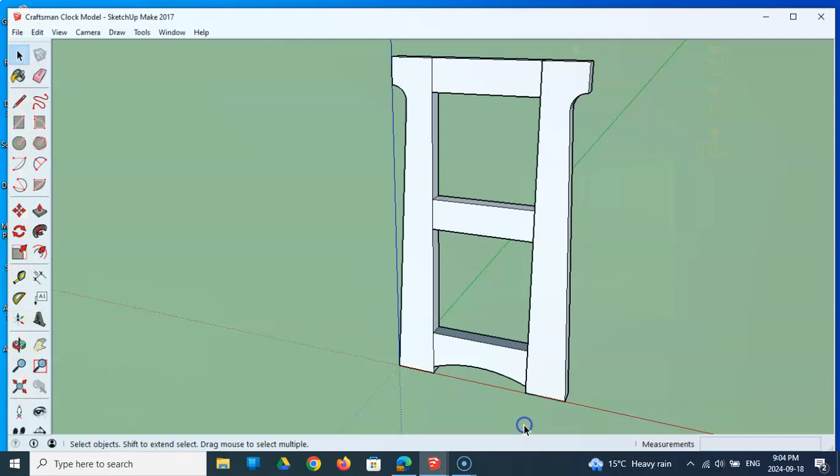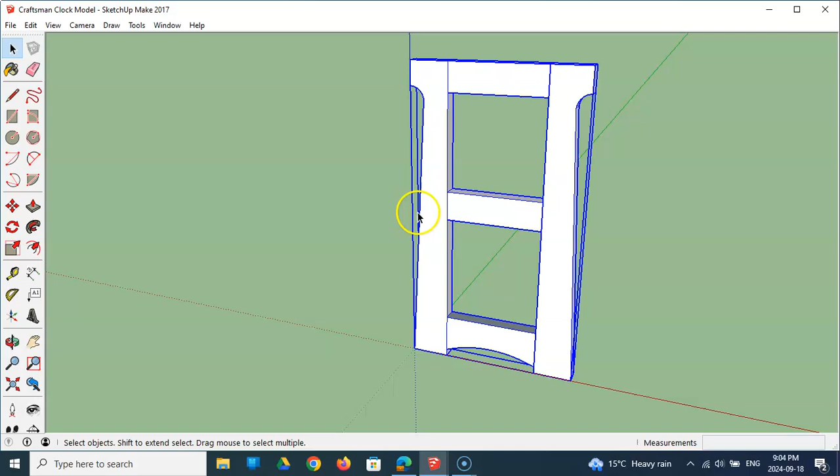Let's begin where we left off with this model. We drew the face frame. The first thing we're going to do is group it. With your cursor, draw a box around that, right click and group. Now this was a group before, but we added this to the group, so when we explode it later, we'll have to explode it 2 times.

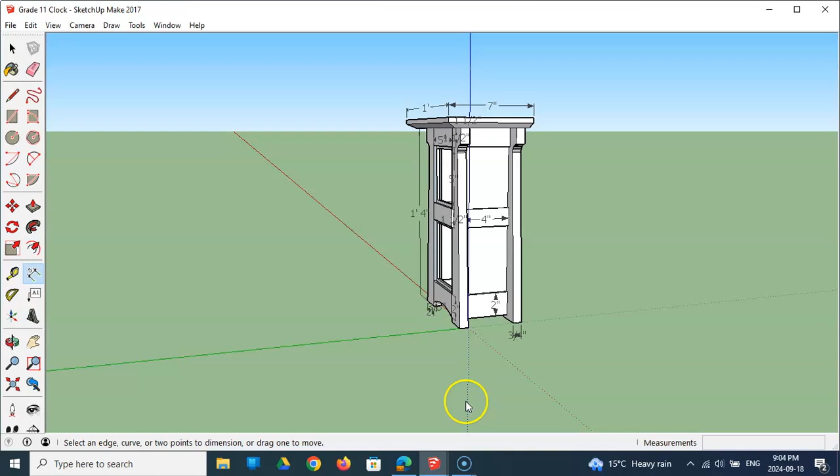Now that we've done that, we're going to build the sides. The sides are 4 inches by this height, which is 16 minus 3/8. We're going to build it as a solid panel and then do some indenting and unindenting and things like that. That's how we go at her.

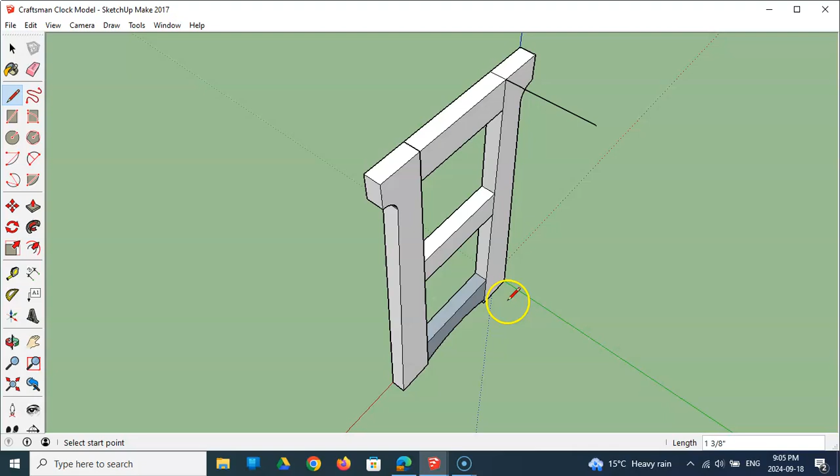Let's orbit to the back. We're going to begin by drawing a line from here out on the green axis 4 inches. That's not on the green axis, let's try that again. On the green axis 4. There we go, I'm going to press escape. I'm going to do it again from the bottom, from where this arch comes around and meets the leg, out on the green 4. I'm not going to detach from that, I'm just going to link up to the top. No, that's not right, that should have went solid.

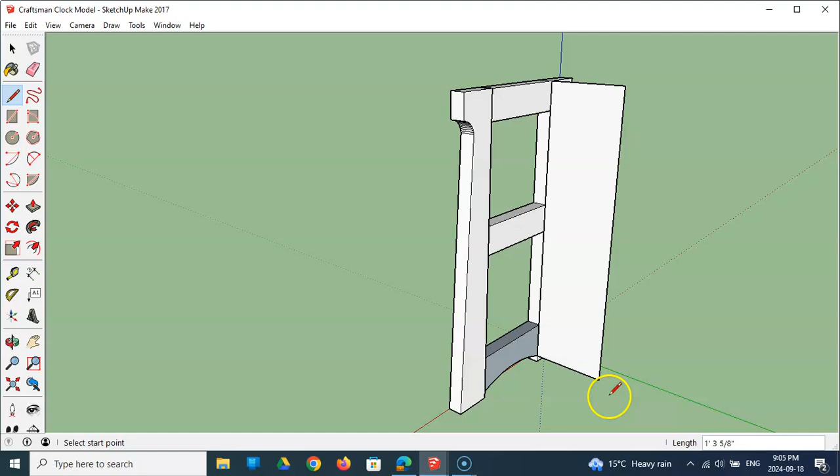Maybe it didn't go solid because this is a group. Let me see, if I draw from here down, that's why. So you have to draw this side as well. We need a panel that is from this bottom of the curve to the top, 4 inches out, down and back. Use your push-pull tool. Actually, not yet, sorry. Get the pencil, click from this point across, and let's just get these points lined up with the boards on the face.

There we go. Now grab your push-pull tool, simply take and push these 0.75. And we'll do the same with this, 0.75. And the bottom, 0.75. That went the wrong way, control Z that. 0.75, there we go. And get your pencil and redraw the straight lines, just to make them solid again. See how they went hollow?

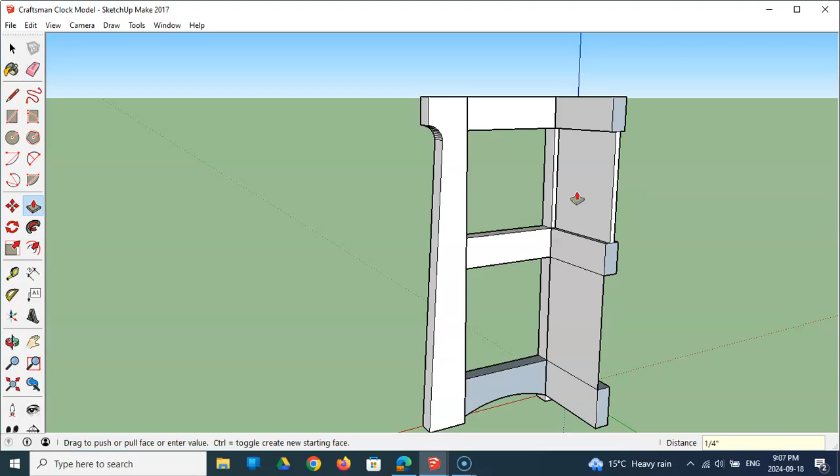So there we go, and then we're now going to take and push-pull this that way, 0.5. And again, if it went hollow, just redraw the lines. We're going to do it again, 0.25. And you can see that gives us a panel right in the middle of that 3/4 inch. So do the same here, push-pull 0.5, and then 0.25. There you go, that was so easy. Let's do it again on this side.

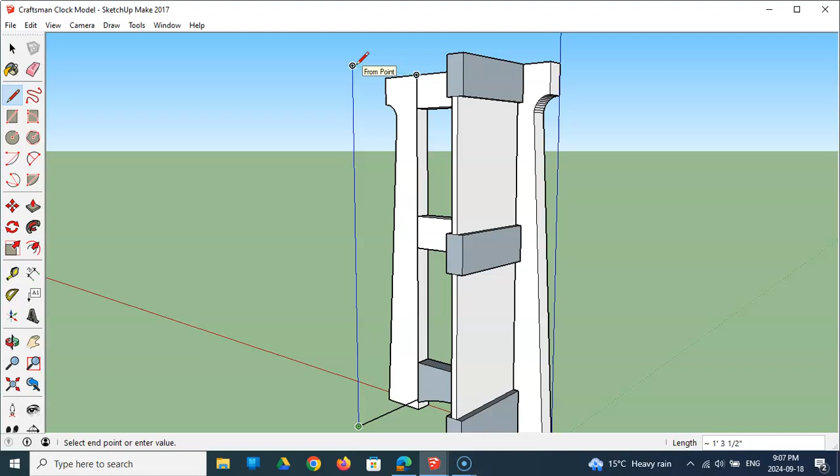It's harder to see on this side, but still doable. We're going to go straight down to that point, come out on the green 4 inches, press enter. We could try going up, and if it guesses where to go, that works. If not, we could just go from the other point, because I don't know this dimension, it's whatever, 16 minus 3/8. But we've got to go from that point to that point, make it solid, double check, everything's lining up.

I'm good with that, happy with that. Let's pull this. No, sorry, I made that mistake twice. Before we push-pull, we have to draw these lines. Boom, boom, boom, and boom. Now we can push-pull this, 0.75.

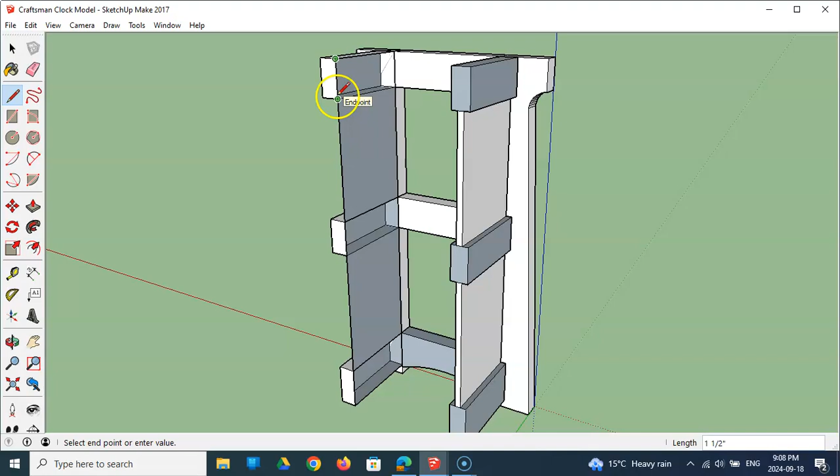We can just match that to that point, match this to this point. Redraw. I'm going to cruise through this because I've showed this already. And 0.5 extrusion on this, and then again 0.25, and 0.5, and 0.25. There you have it, your side panels.

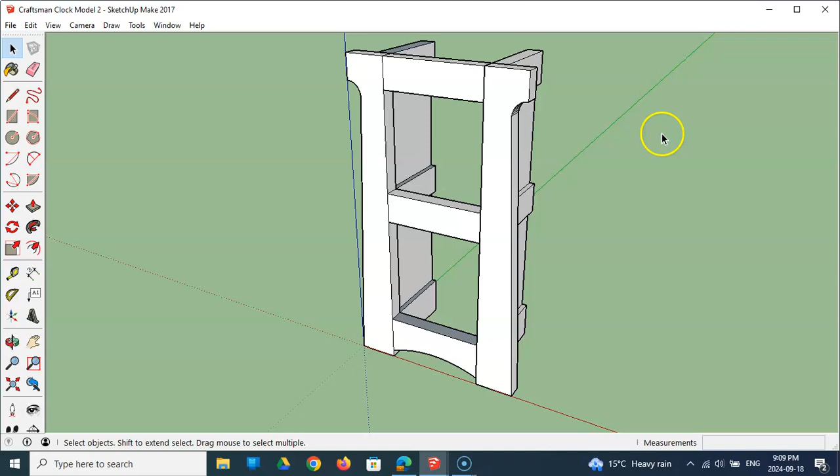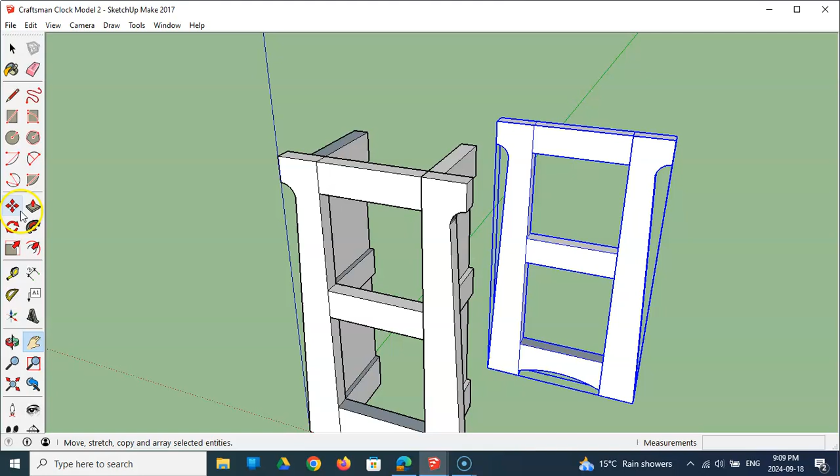Now remember we grouped this front. The reason we did that before is so we wouldn't have to erase the stuff we didn't need when we copied and pasted it. So when we click on this, it's grouped. Click on it, press Control C and Control V, and you're going to get another one. Now we're just going to place it, put it down first of all. I'm just going to press H or get my hand. I want to move it using my move tool from this point to this point. So I simply get my move tool, click on this point, and go close and click on this point, just like that.

Okay, I'm going to get my pencil, deselect all of this. I'm happy with what I have so far. Now let's do the top.

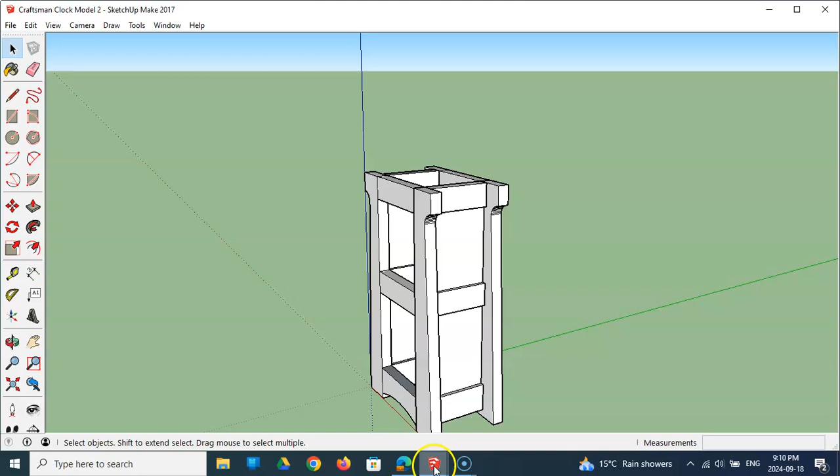The top, if you take a look at the example, has a 7 by 12 inch, or 1 foot by 7 inch top, and it overhangs 1.5 inches over everywhere except the back. The back is flush. Now I had measured it before, that's why I know the overhang, and I also drew this, that's why I know the overhang. Okay, so we're going to do that now.

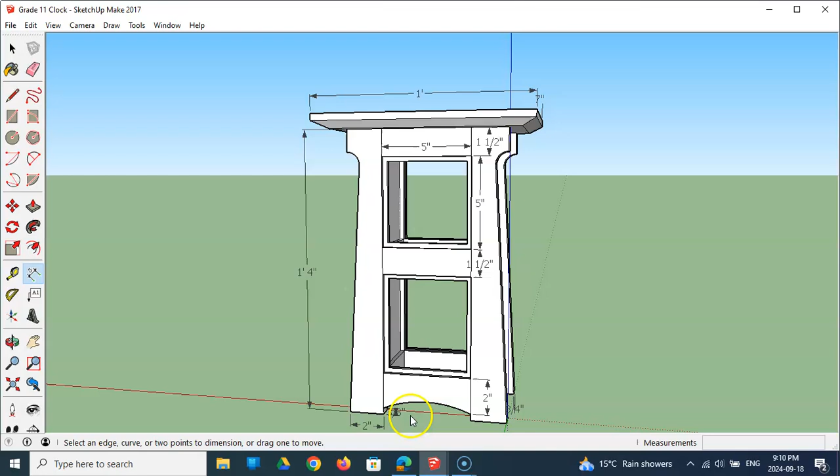Let's grab our model. To do this, I'm going to zoom in closer to the top. Simply take, we could use this tool. We could click on here, and then we could go like this and that. So I didn't click here, I just went to that point and went up, and I went 3/4 or 0.75. Okay.

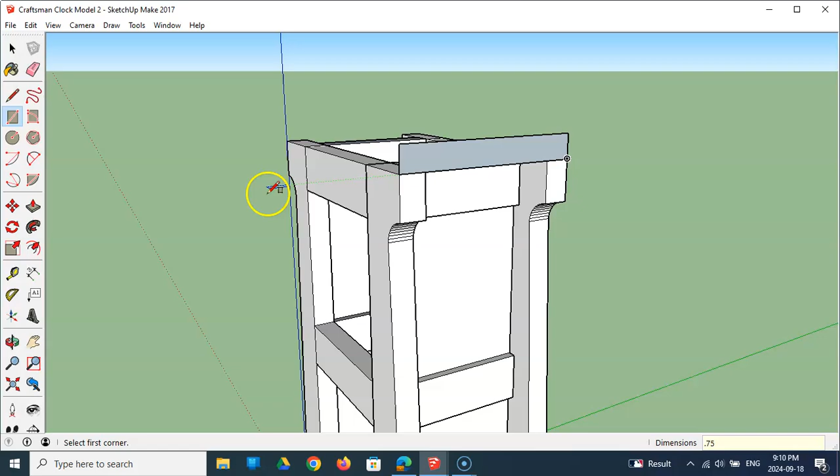That's just to show you a different tool. Now we can take our push-pull tool, and we're going to push this to the other point and lock it in. Now it's flat, there's no overhang.

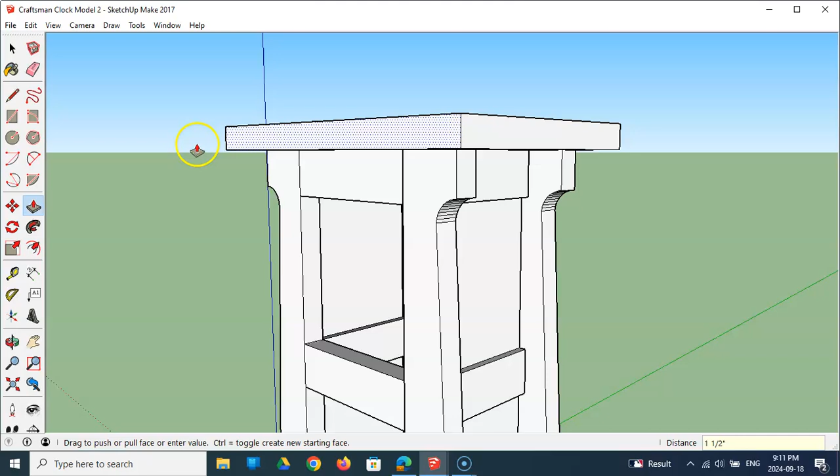I don't like that. I want some overhang. So I'm going to pull this out 1.5. I'm going to pull this forward 1.5. And I'm going to rotate to the other side. Pull this out 1.5.

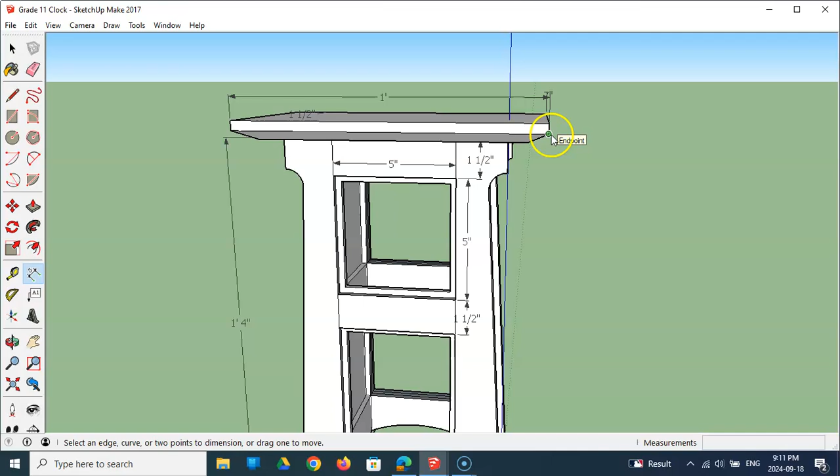Almost done. Actually, no, we have to still do some stuff on the inside. Now, the overhang has a chamfer on it. It has a beveled top. See that? So that beveled top starts halfway, and I believe it goes in about 1 inch. Let's see what that looks like.

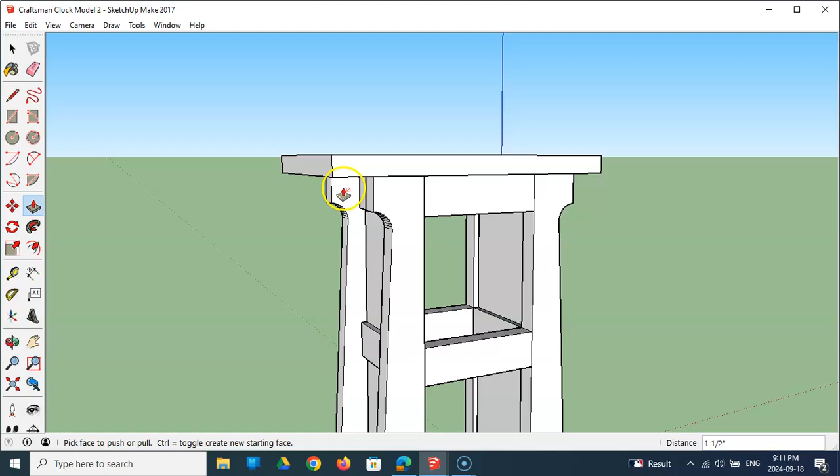That's neither here nor there, but let's just get a bevel on the top. Now we want to do that on the back side because we're going to use something called the Follow Me tool. So on the back, we're going to zoom in, and we're going to go from this point 1 inch in. So we're just going to drop this here, go 1 inch, enter, find that green dot, click on it, and then find the midpoint. See how it'll just jump to the midpoint on this side? So that's the chamfer.

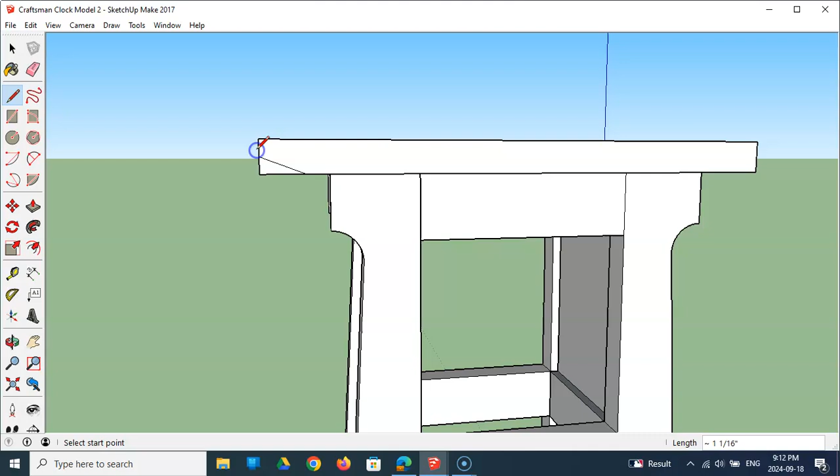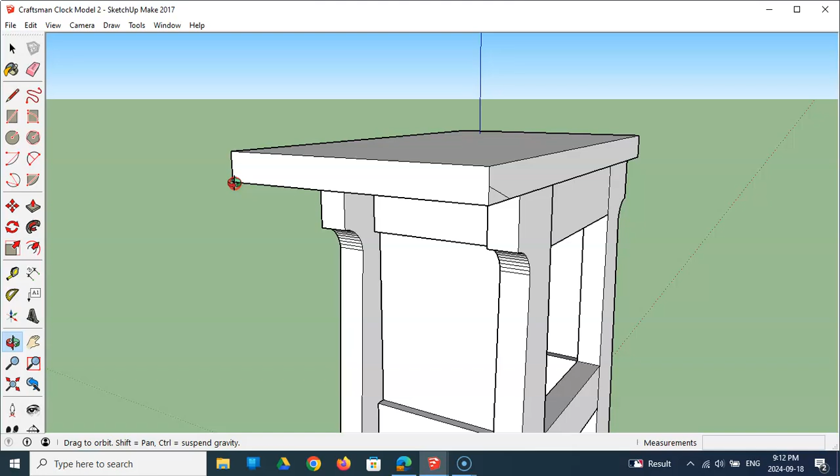You can do this with any pattern, but we're going to just do a chamfer. And then you use this tool here called a Follow Me tool. So what you do is you click on this pattern, okay, and I haven't clicked on it yet. I'm going to turn a little bit. I click on the pattern, and then I just take my cursor and go around the side. When I get here, I press the orbit, and then I go like this, okay, and then like this. You can see it's following me.

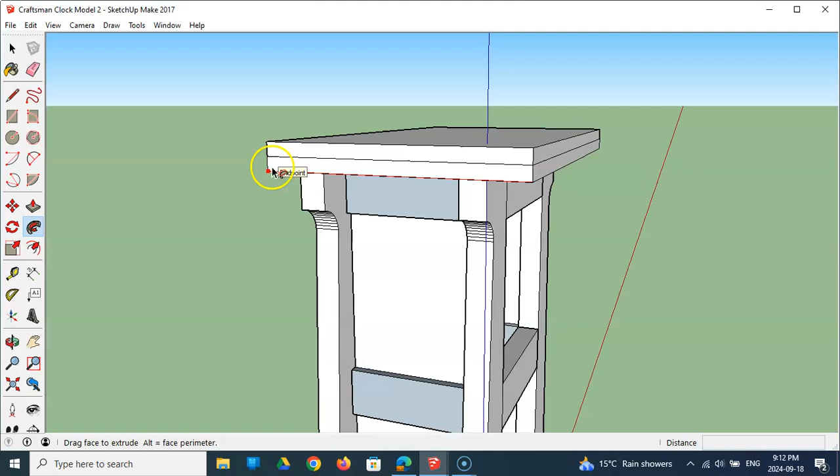It's asking me where do I want this chamfer to go. So I go to here, orbit, so far so good, and then I go over here, and once I get to here, I click. And it follows that chamfer all the way around. Now the design I just have to delete with my eraser.

Okay, there you have it. What a great time to save. File, save. We've already named it. Save.

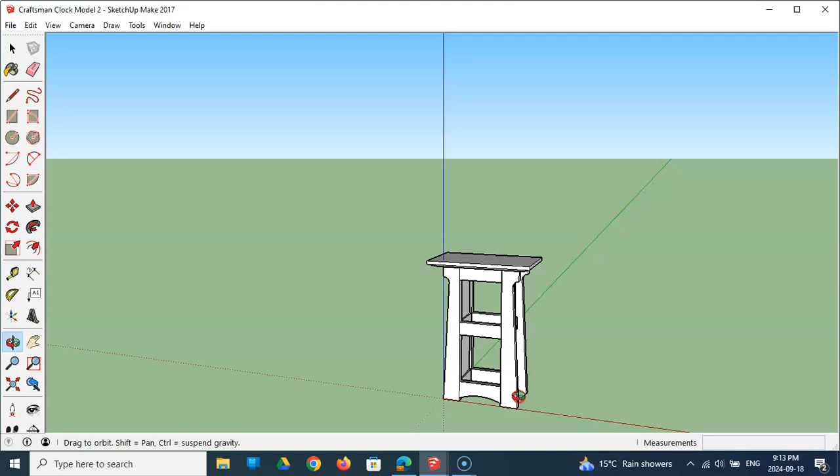Now the last thing we're going to do, and I've had some problems with this, so hopefully not this time. We're going to take this little, here I'll show you in the example, 1/4 inch by 1/4 inch centered in the middle, that little molding in there.

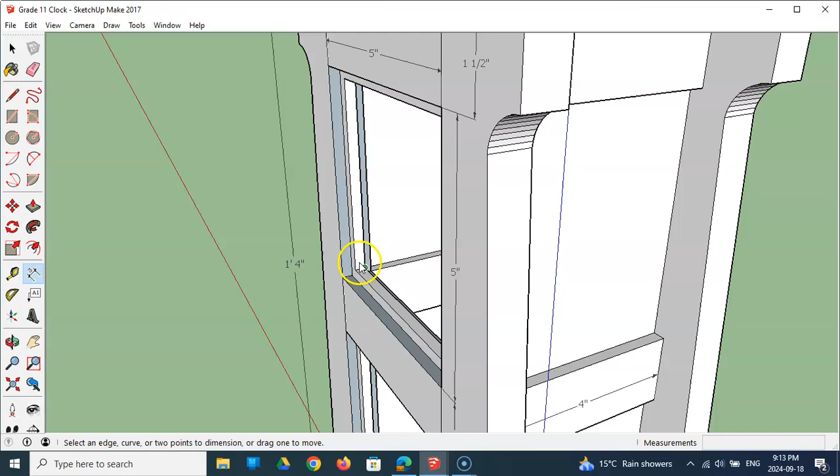Okay. Now that I'm looking at it, I think we're actually just going to make it - how are we going to do this? Well, let's try to do this. Let's see if we can make that work. I did it before, but let's see if we can do it again.

So back to our model. The way I did this is I grabbed the pencil and I just redrew one of these. Now because it's grouped it might not... No. So I'm going to undo that.

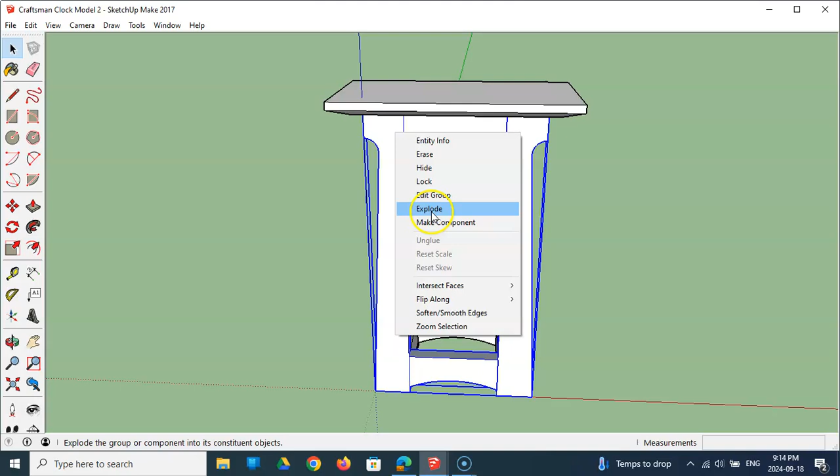Let's first of all explode this. Don't do what I just did. Click on this, right click, and explode. And we're going to do the same with this. We're going to explode any piece that are together. So now all these are individual pieces. So they're all exploded. I believe that's the key to success.

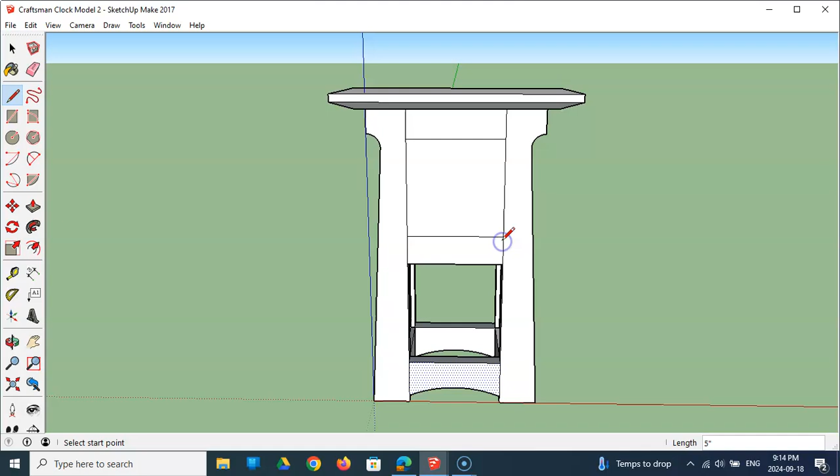Grab the pencil now, and we're going to just redraw one of these lines here and one of these lines here, and that will make this solid.

The tool we're going to use now is called an offset tool, and the way it works is on any shape, I can take a shape and make it - oh, I accidentally picked the bottom one, but you can see I can make it bigger and smaller.

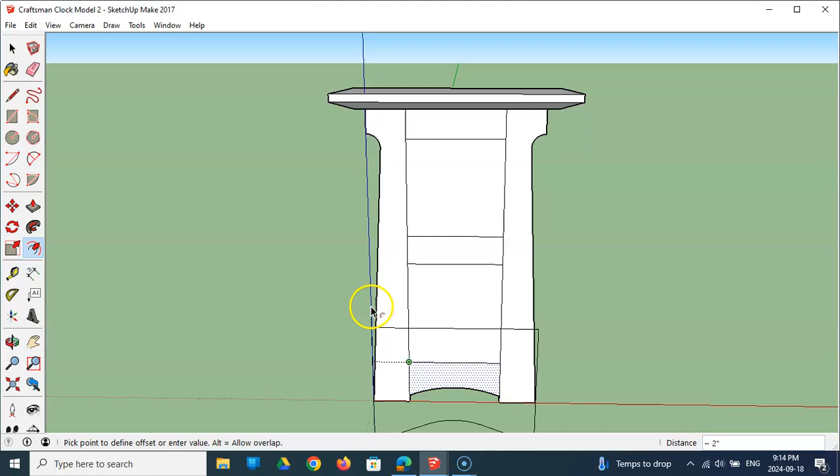So I'm going to press escape, and I'm going to go to this one. I'm going to just do a single click. Whoops, that double clicked. I'm going to do a single click, move my mouse, and you can see as I'm moving it, it gets bigger or smaller. It's asking me how big do I want this to be, how far away from that point. So I'm going to go 0.25, enter.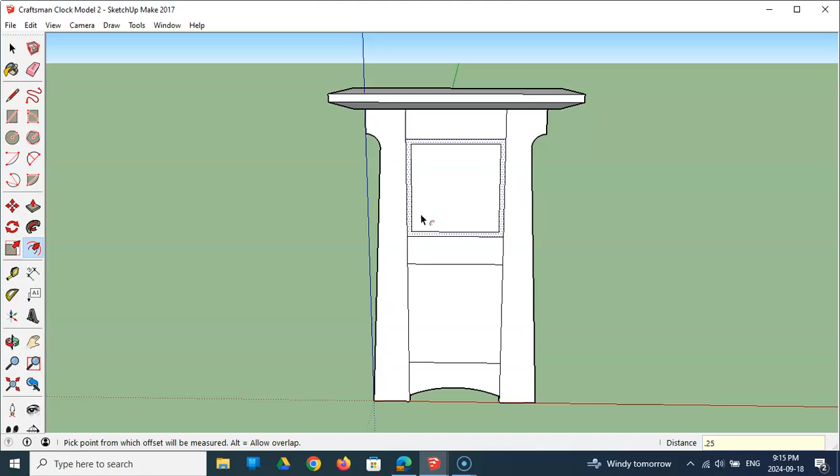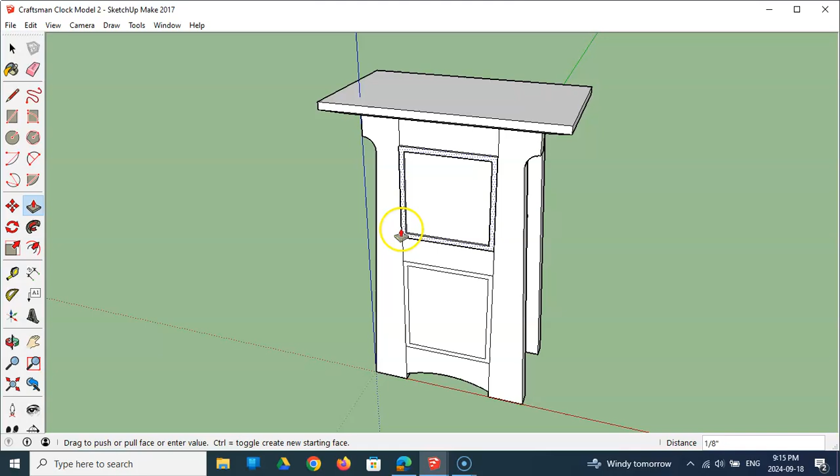And I'll do the same on the bottom since I have the tool. 0.25, enter. Now simply take, and I want you to push-pull this right here. Now you can't really see what you're doing. Well, I guess there you can see it's going backwards. So I want you to push it away from you. How much are we going to do? 0.5, let's go.

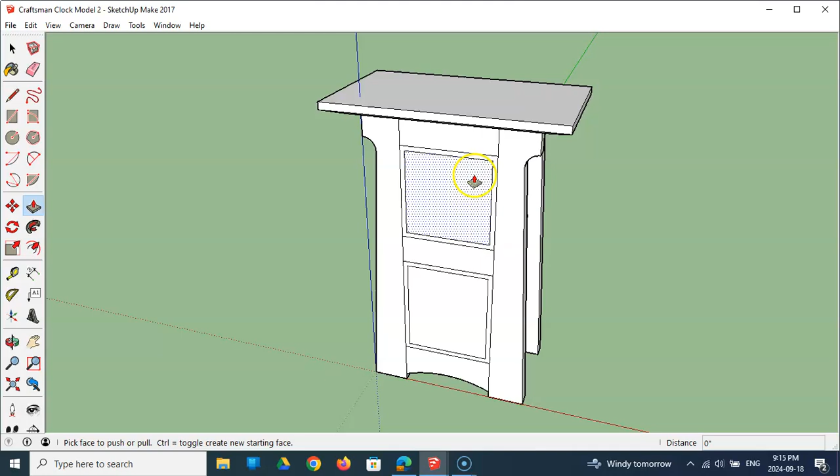Nope, nope, nope, that's not going to work. We're going to do it a little differently. I'm going to Control Z that, so pretend I didn't do that. First, let's delete the center - click on it, press delete. Okay, now you can see you've got this thin piece of paper here.

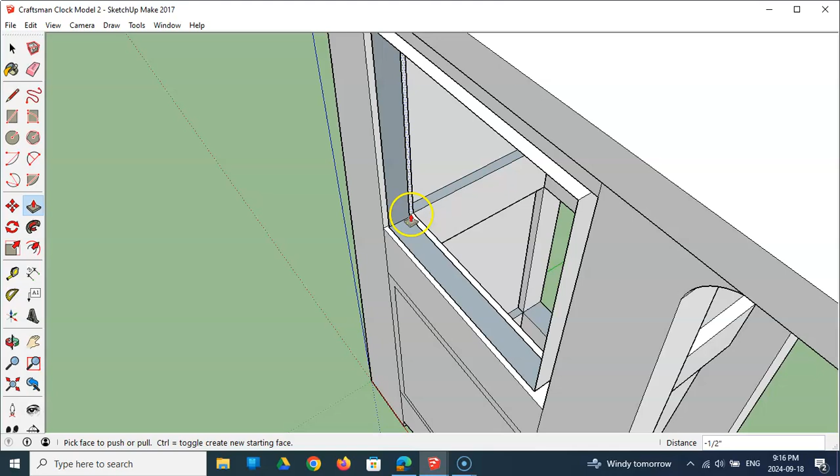Let's try doing that 0.5. I'm going to push this back, 0.5, enter. Okay, so what it did is you can see it didn't quite go because this is a 0.75 piece of wood, 3/4 inch, and it's hollow. So let's make that solid.

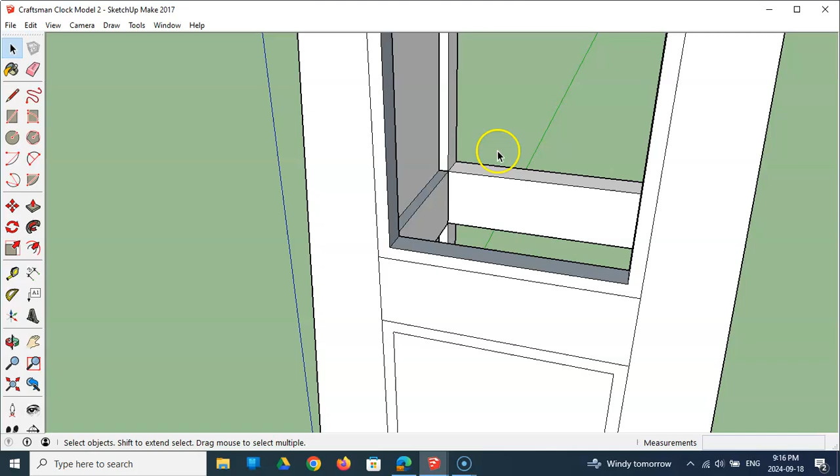It made the middle solid. Now let's make the outside solid. And then let's delete the middle - it's important that you do that, otherwise it doesn't seem to want to work. So once you've done that, this is now a solid piece. We're going to push this in 0.25.

There you have it. Okay, let's do the exact same thing to the bottom. We're going to delete the middle, and we're going to push that in 0.5.

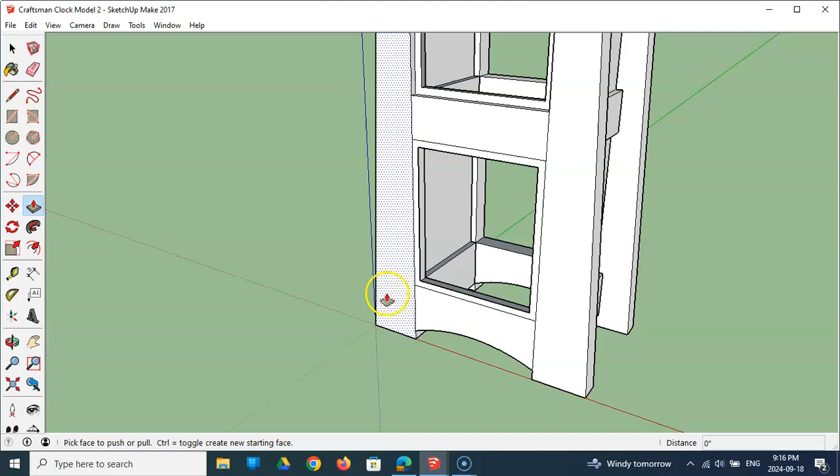Redraw this line to make it solid. Even though we're going to delete it, it's important you do this step. The computer seems to like it if we do it this way. Now delete the middle - okay, it just seems to work, trust me. I've struggled with this one. So now we're going to push this in 0.25.

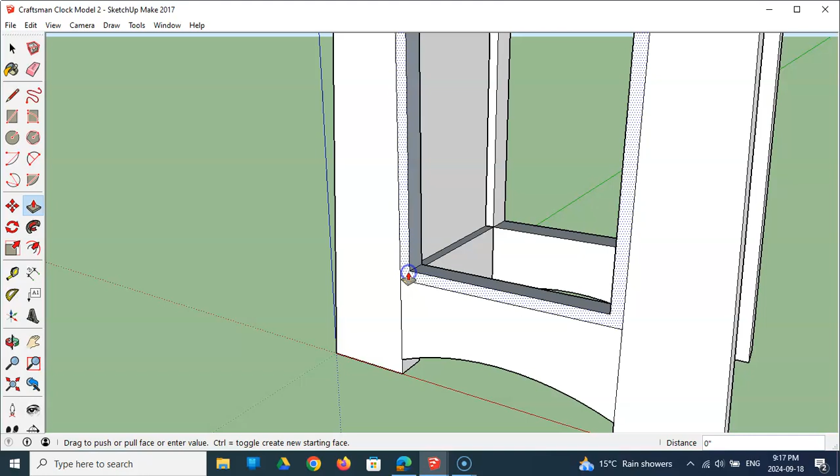There you have it, an almost completed clock. We'll fit that in there. Look at that, I like it. I like it so much I'm going to save it. What a great time to save.

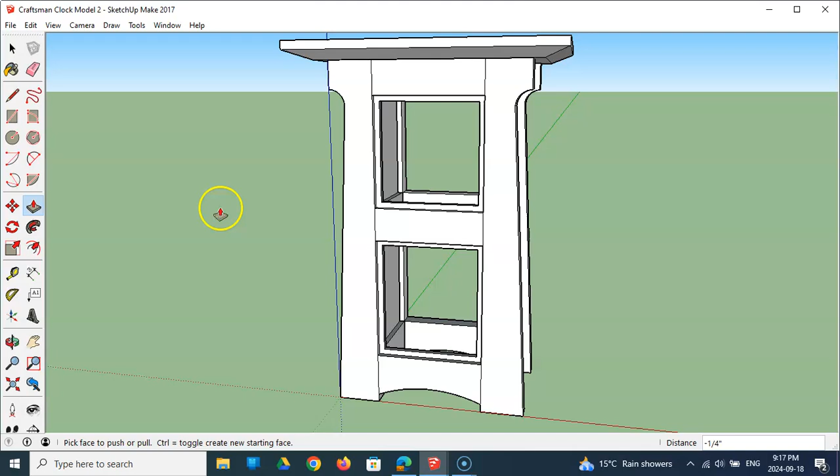Now here's a good chance for you to decorate it a bit, make it your own. I'm going to make this just wood, so a wood paint we'll put on it. You're going to be looking for a paint bucket. When you click on that, it opens up these trays on the side - you can get colors, components, styles, shadows, different things like that. If I click this down arrow, I can find wood.

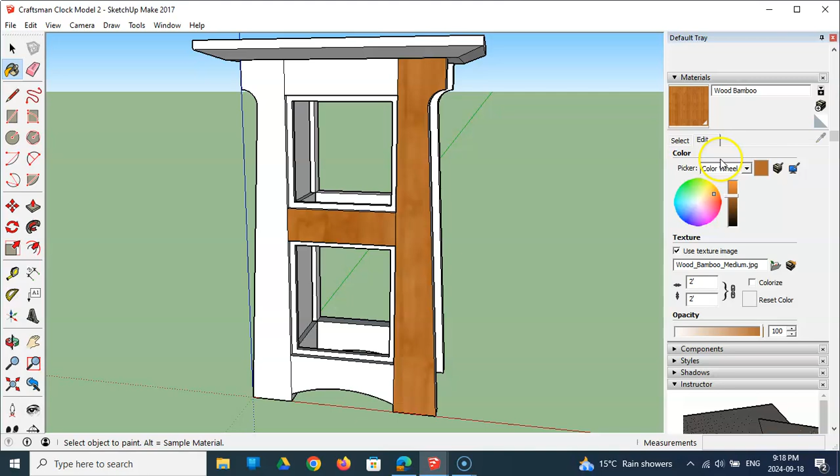There's wood, and I'm going to build mine with, I don't know, let's try this one, see what it looks like. We just click on it, and you can see that you can edit the texture, so you should be able to do the size here. Let's see if I make this 1. Yeah, you can see when I change that, it changes the texture.

Let's say I go 0.5, or let's say I make it 5. So it was at 2 before - I didn't like that blurriness. Oh, that's not too bad, I guess. So that's wood, that's one of the wood colors.

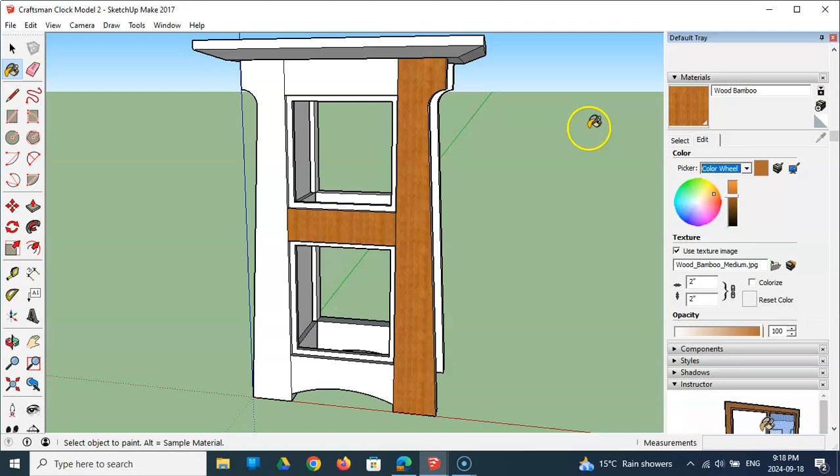You can change all kinds of things in here, so you can change it, make it your own. I'm okay with that. Once you have what you like, you just click on all the pieces - you've got to click on all the different parts that are white. You might have to zoom in.

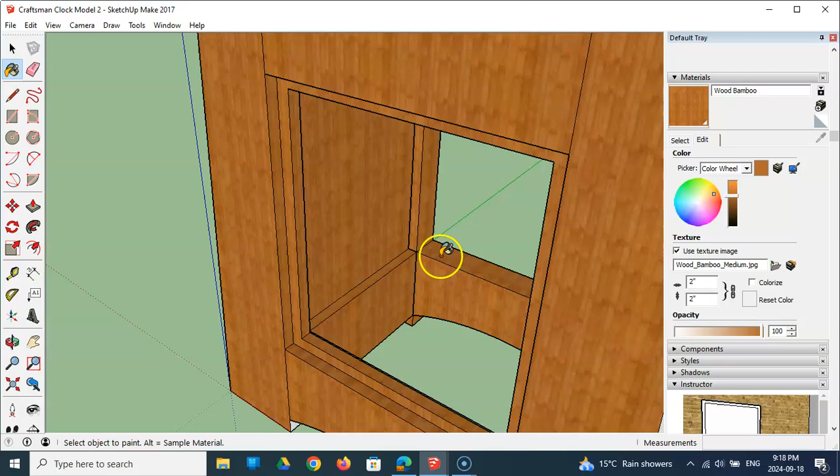Oh, see, notice how the back went all at once? That's because it was grouped. Oh, we gotta do each of these little things here. Interesting, we'll get to that. I'm just clicking the stuff that's easy right now.

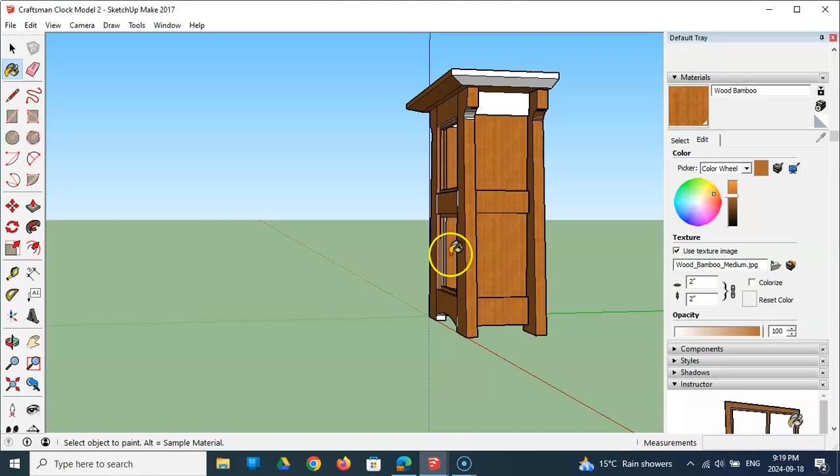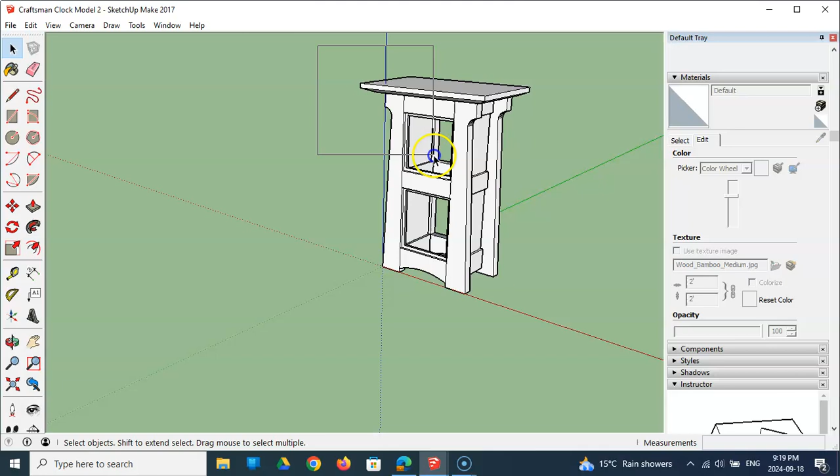I wonder, I wonder if I grouped the whole thing and painted it. Let me try this, I've never tried this before. Why not try it on a video? I'm going to Control Z until I get back to nothing, and I'm going to try grouping it all. Let's try this, because I want it all the same color. Right click, make group - now does it let me paint it?

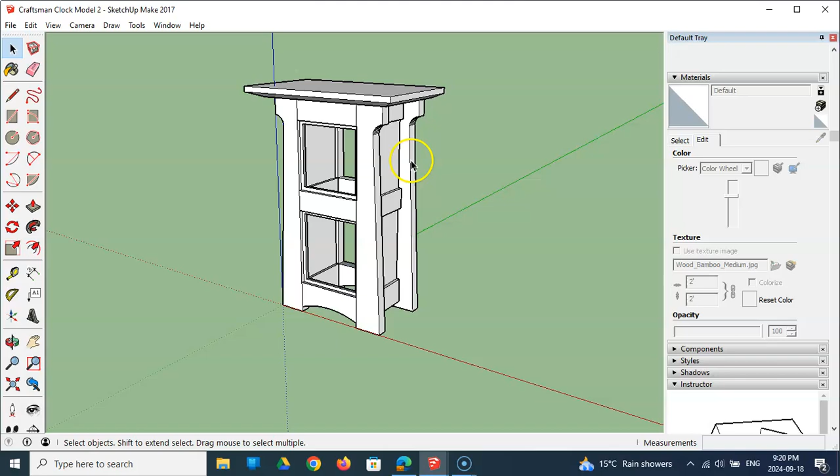No, come on. Doesn't like that. I thought because it grouped the back. I guess not, so I guess I'm going to Control Z the grouping. Oh, too much there, I'm going to Control Z that. Click on it - yeah, it's not grouped. The back is still grouped, which is interesting, so because that's grouped.

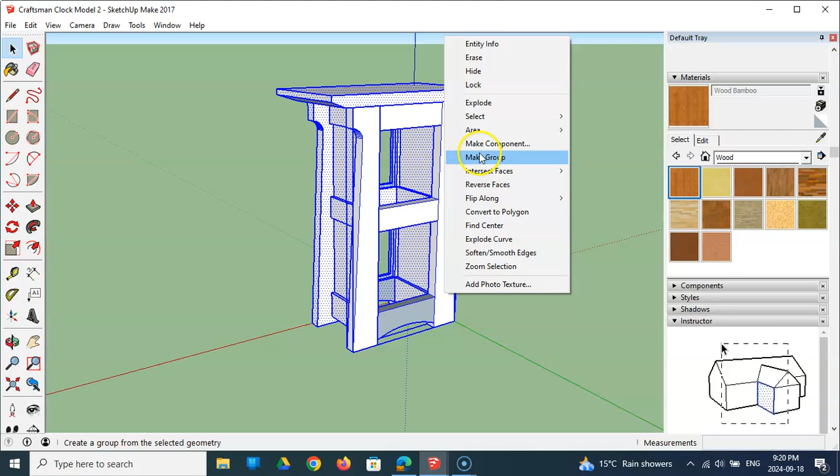Okay, so where is my colors? There's wood. Was that the problem? I was just not in the right spot? Let me see one more time. Maybe I was just not in the right spot over here. Deselect, grab this, grab that. Yes, it does work, I just wasn't selected in the right spot here. So there you go, you can group it and just paint it all at the same time. Huh, taught myself something new.

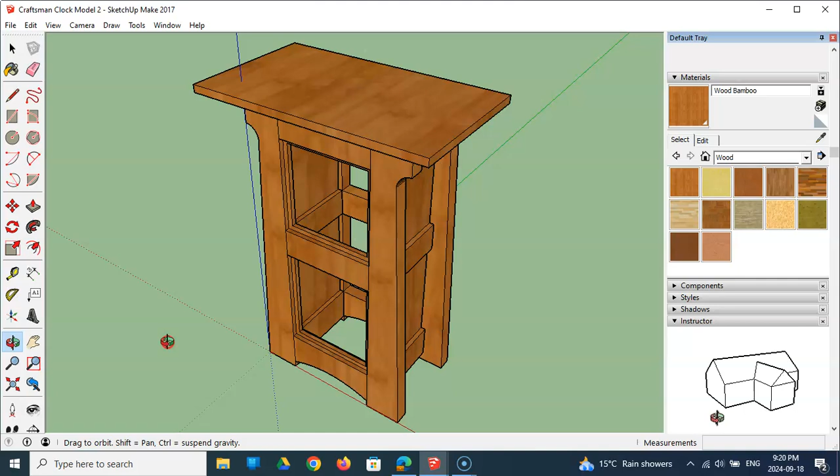There you have it, people. That you're going to send to me. But before you send it to me, you need to personalize it with your name. So grab 3D text.

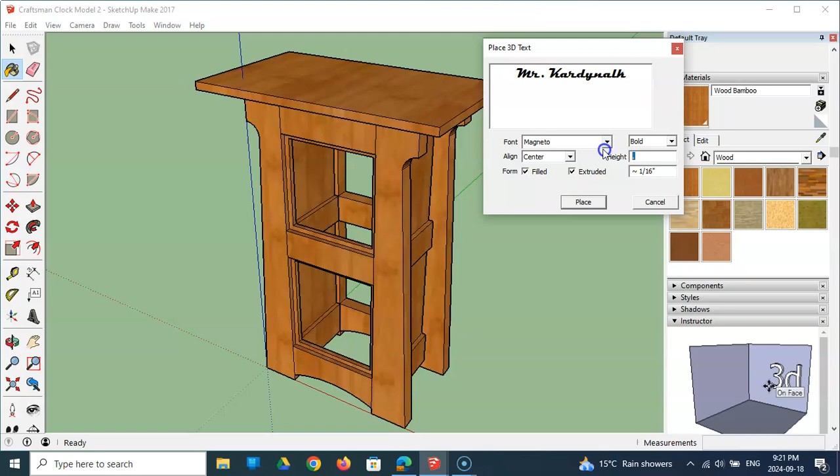And that pops up, I'm going to type in Mr. Kardynal. Now, 1 inch height - that's probably going to be too much. I'm going to put 0.5. No, that 1 inch might fit. I'm going to go 0.75 and see what it looks like.

Yeah, 0.75 is okay, I can place it. You can see I spelt my name wrong. You're kidding me. Try that again. Try that again - and that was pretty big and gaudy. I want it smaller.

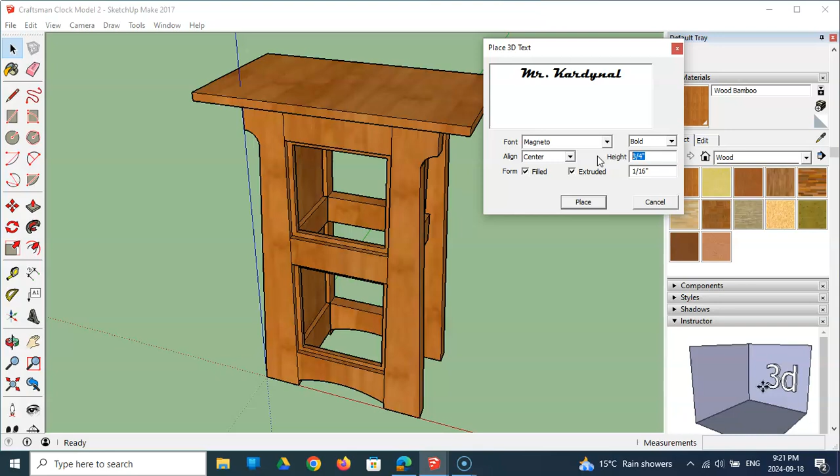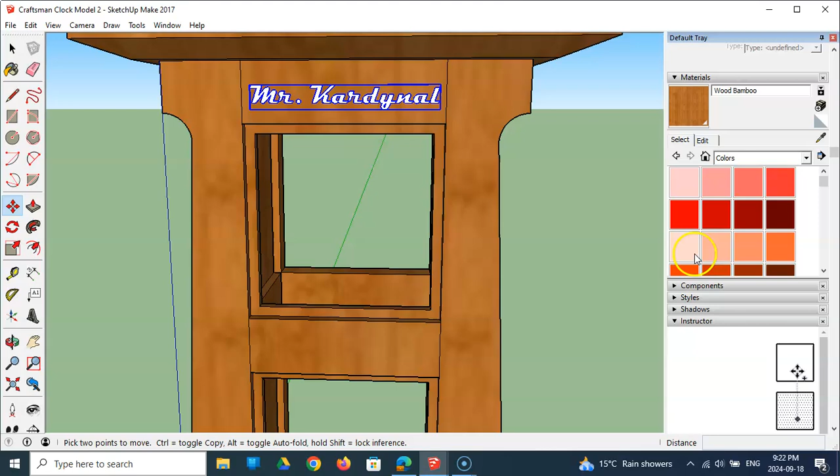Sure, we'll go with that. I'm going to place that right there. And you can also color that as well, so let's say I wanted that in a color, and I just wanted to put it dark. I think you can color it. There we go, there you go.

Great, I'm liking it. I'm going to fit to screen. I'm going to save that.